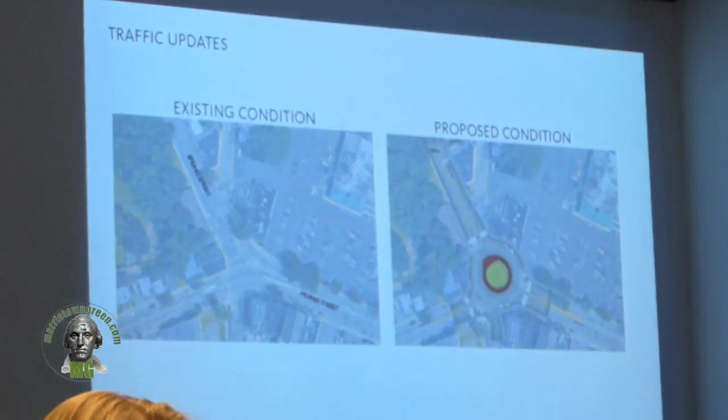The modeling done of the system is extensive, it's integrated, and it actually creates the ability to understand the interaction that occurs between the various signals and the geometries that occur on the roadway system. So that was very important to the project. We also had the ability to reach out to the traffic engineer for the Morristown Parking Authority and get his information on the planned deck that will support some of the other developments that are going on in the area. Certainly we've made projections as to the types and amount of traffic that would be occurring by the redevelopment of the Midtown Shopping Center with this project. So that's been boiled into the numbers as well as other growth in order to take a comprehensive look at the roadway system.

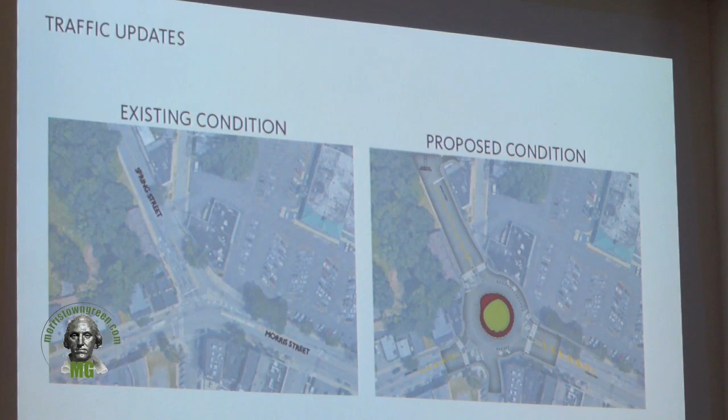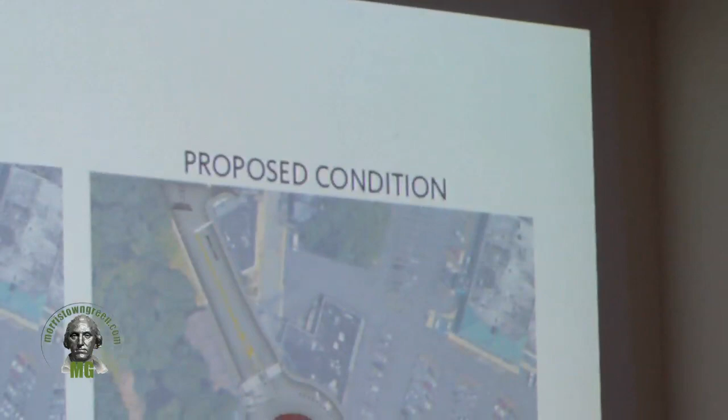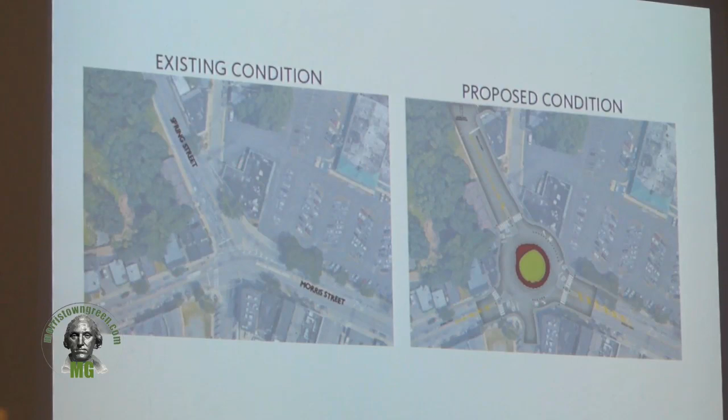We even went a step further to ensure that our operational analysis and analysis of our solutions were feasible and could be implemented. And that step was to actually start to do preliminary design on real survey, so that when we're before this board, we're not just talking about coming in with a concept, with a roundabout that might or might not fit. It fits. It's been designed to a degree that we know it can work geometrically, it can fit geometrically, we've gone to the extent of looking at preliminary grading. So we're here tonight with a wealth of information so that we could be confident what we were projecting to you was more than just preliminary analysis and preliminary suggestion that this is a viable alternative. It is a tested alternative.

We've also had the opportunity over the last several months in particular to interact with your professional, Brian Proska of TPD. He was also very insightful. He's also very knowledgeable about roundabouts and roundabout design, and he provided quite a bit of information and input to both Matt and myself as we tested the proposed solution out here, and helped bring us to where we are today and what we're presenting this evening. So with that, tonight Matt is actually going to take a few minutes and go through the design of the roundabout itself, some of the key features of the roundabout, and generally how it lays out and works.

And then I'm going to step back in and talk about the operational analysis of the roundabout and what it means to the system, to give you a sense of what's happening and why this solution is something that is both exciting and a good fit for both this plan and for Morristown. So with that, Matt. Thank you, Carl.

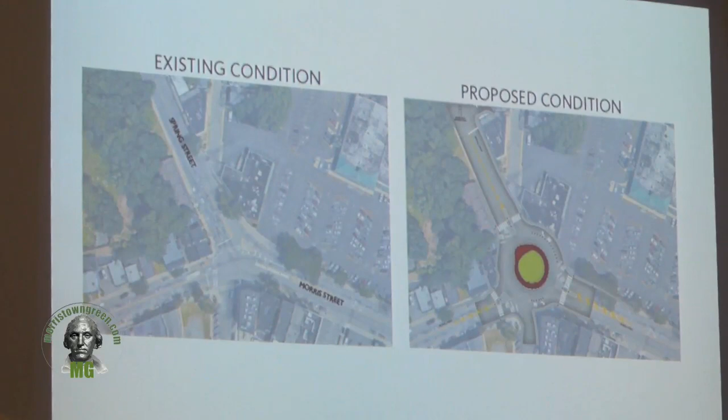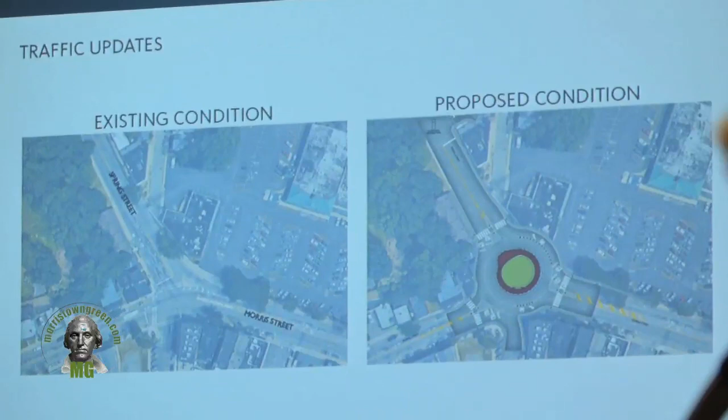Just to orientate the audience here, what we have on the screen before you, on the left-hand side, is the aerial image of what you see out there today. We have Spring Street running from the top left to the center of the screen. You have Morris Street, which kind of does this slight curve. You've got Wilmot coming down to the bottom of the page. That's the existing condition. Everyone who's been out there knows the traffic issues that are experienced at this intersection, particularly during the evening peak hour.

There are times in the morning peak hour, even on Saturdays, where you see a lot of congestion through this area. Obviously, Morristown gets a considerable amount of traffic that just passes through the area as opposed to traffic destined here, so you're somewhat subjected to traffic that is not really coming to any of your uses, but you're stuck dealing with the consequences of it. The intersection, while a Y-shaped roadway network is great for creating vistas from a planning point of view, from a traffic point of view, and there's a number of them in Morristown, can create some traffic issues in terms of operations.

What you have currently is a signal timing that gives the Morris Street approach about 2/3 of the green time. They get the green light, as opposed to Spring Street, which, especially in the PM, sees just as much traffic, is somewhat choked, and you see extensive queuing in which it may take 1, 2, 3 cycles for cars to clear on Spring Street. And that idling, that queuing is not good for anyone. It's not good for the pedestrians, it's not good for the vehicles, the drivers. So you have this existing condition where there's a considerable amount of congestion.

On the right-hand side is the design of our proposed roundabout. Now before I get into this specific roundabout, it's important to separate what people associate with the New Jersey traffic circle from this modern roundabout. This isn't what was in Ledgewood, this isn't what you see down the shore where you have these massive state highways that intersect at these circles at high speeds, at massive diameters, where the right-of-way may differ on each approach. You may have to yield when you're coming into traffic circles, or you may be yielding from the inside. That's not what we're designing here.

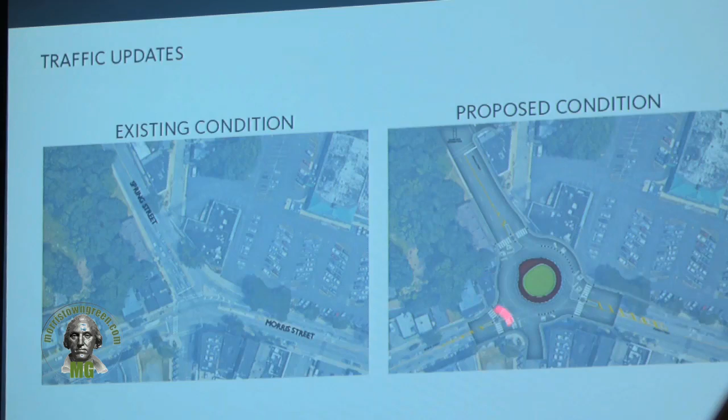So what you currently have at intersections like this, a stop-and-go intersection at a traffic light, you have people gunning it through the light to make it and then slowing down and stopping. At roundabouts, you actually proceed in traffic at around 10 to 15 miles an hour, so you're creating a traffic calming device automatically. People can't speed through a roundabout because they physically cannot deal with the geometry. So people slow down to 10 to 15 miles an hour, a pedestrian level speed. So you no longer have people flying through this intersection, which has enhanced benefits.

Additionally, it creates operational benefits in peak and off-peak time periods. When you get to a traffic light in the middle of the night, you leave a council meeting and it's 11:30 at night, you get stuck at that red light and no one's around, and you're waiting, idling for 30 seconds for the light to turn green. That doesn't happen at a roundabout. At a roundabout, you proceed one after another at all times. The continuous motion of a roundabout, again, helps decrease that stop-and-go feel. You're basically continuously moving through the roundabout.

Additionally, there are improvements as it relates to creating a sense of place. As I mentioned, Y intersections, from an urban planning point of view, are focal points; you see a lot of historic churches located on intersections like that, but it creates an issue from a traffic planning point of view. With this roundabout, you have a new focal point when you're coming from the green or coming into town from 287. You now have a new gateway, something to put in the center of that roundabout, whether it's something artistic or some type of landscaping. It creates a definitive sense of place, which leads to the pedestrian benefits along this entire corridor that we're proposing here before you.

From the pedestrian point of view, there's a significant amount of benefits that we're carrying through from the site plan, which you see at the top of this page, through the crossing mechanisms. At a roundabout, what you have is actually shorter crossing distances than you have at a typical signalized intersection. If this intersection, as a signal, would have to get upgraded or widened, you're talking about 4, 5, 6 lanes of traffic that you have to cross, as opposed to 2 lanes of traffic at a time at a roundabout.

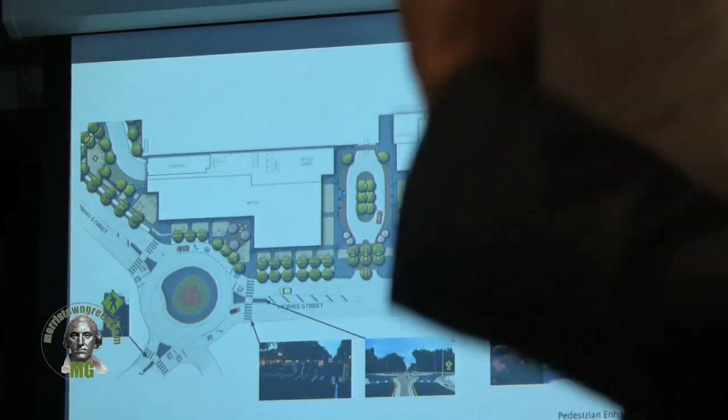As well, when you are approaching a signalized intersection, most of the pedestrian crossings are done at the side of you, so they're out of the visibility of the vehicle when they start to accelerate. At a roundabout, the pedestrian has great visibility to any drivers coming through the area. So there are significant benefits to adding this roundabout as a pedestrian feature.

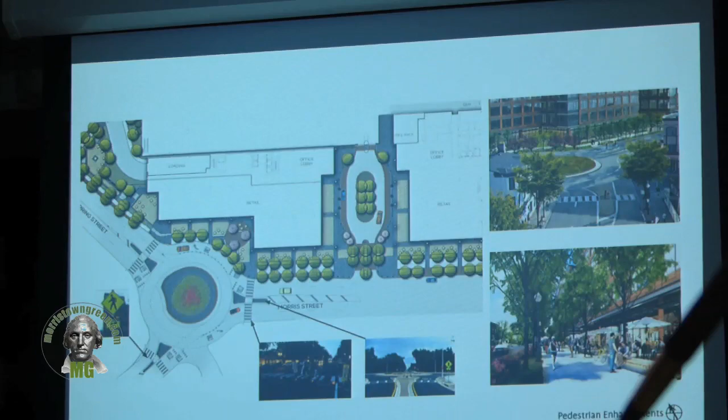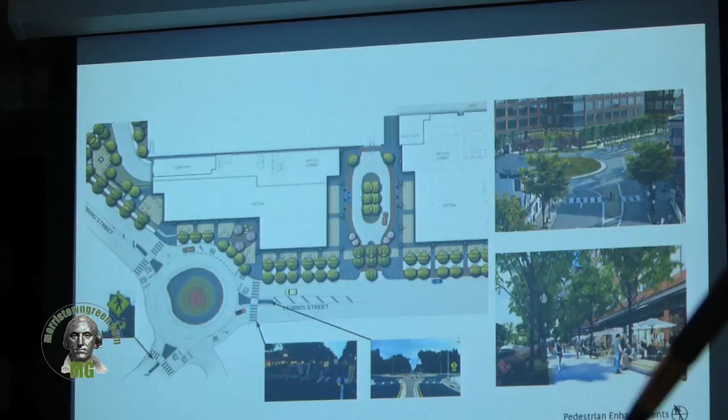As I mentioned, the queuing, and Carl will talk about the operations of this specific roundabout, but the queuing that you see on Spring, queuing you see on Morris is brought down significantly. So you're seeing environmental benefits, as well as the fact that the amount of pavement that we have out here is much less than what a typical traffic signal will require, so you have environmental benefits from a stormwater management point of view. This really helps carry that pedestrian connection that you see in front of this site towards the green by providing this sense of place, this roundabout. Now I'll turn it over to Carl to talk about, from the vehicular standpoint, the benefits we get from this specific roundabout.

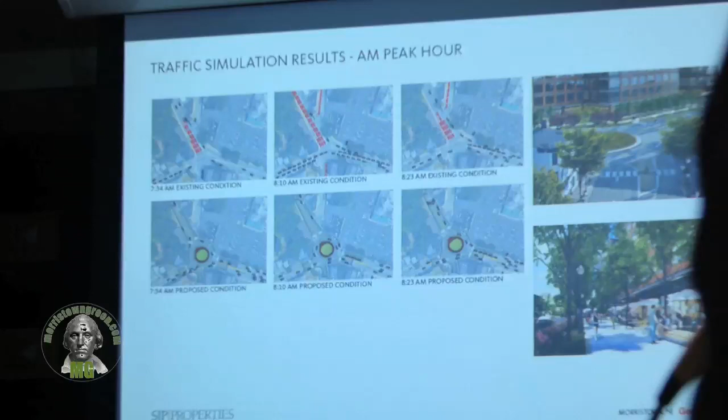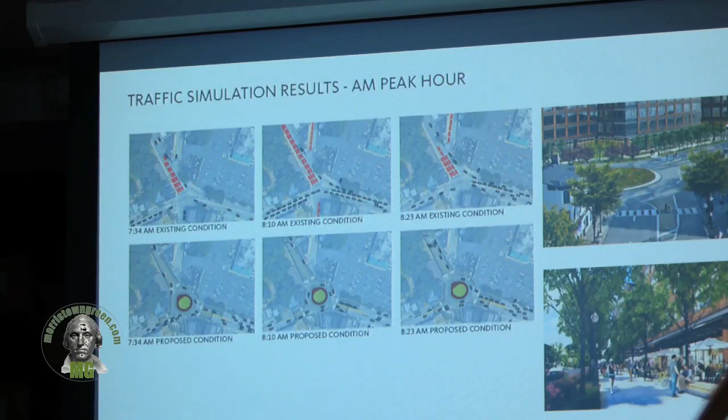Those analyses, as you know from a traffic engineering standpoint, are generally focused on the peak periods of the roadway, which for all intents and purposes occur in the morning peak hours, 7:30 to 8:30, and the evening peak hours out here, about 5 to 6 p.m. Further, in Morristown, the highest traffic flows we've always seen are occurring in that evening peak hour between 5 and 6. If you want to hit to the next slide, I'll just hit a couple of high points in the PM peak hour.

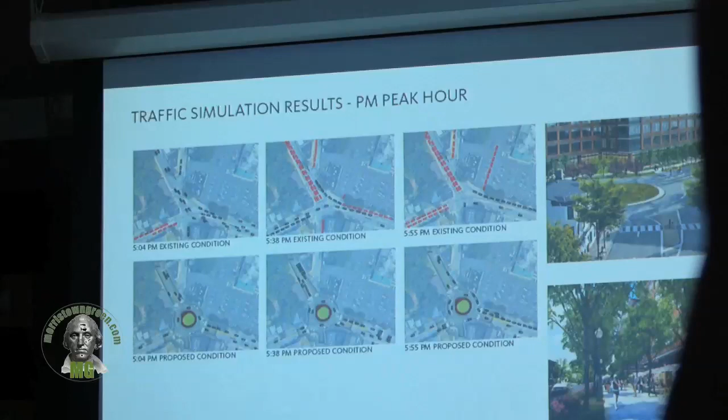What we've depicted up on the screen is basically a couple of snapshots of what the analysis is showing us. We go through a whole series of modeling. We use different modeling techniques, different analysis techniques to cross-check the results, and that includes a level of service analysis, capacity analysis, and queuing and delay analysis of the intersections. So what's shown up here is basically, over the course of that PM hour, a couple of snapshots of what the analysis is showing us.

At the top is the no-build conditions in the future, which probably represent what you see out there every day today: the long queues along Spring Street, the difficulties getting out of Spring Place, queues coming off of Lafayette that at times can extend from our intersection up to the green. In fact, there's times when the approach to the green backs through the intersection and can lock up the intersection a little bit. Below that is the analysis results for the same time period during that hour, which shows that continuous movement result that Matt was talking about earlier, that frees up the flow through this node in the network, eliminating the long queues on Spring Street, reducing the queues both coming to and from the green.

And that occurs because what's happening with the roundabout is that continuous movement, the ability to take the platoon of traffic that comes from the prior intersection and not stop that platoon again and then stop it at the next signal. It allows that platoon to start to dissipate as it carries through the network, as it wants to go to Spring Street or continue on to the next signal on Lafayette.

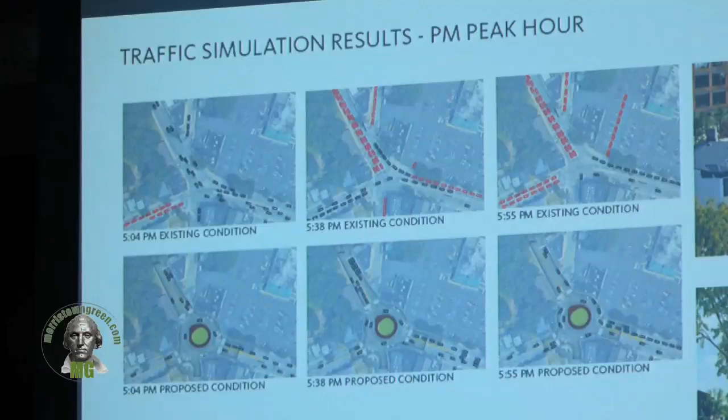That free flow movement also results in some better and more efficient feeding to the downstream signals. So when those signals go green, they're fully loaded and they're ready to process the traffic rather than waiting for the platoon of traffic that may have been held up at this intersection. So what we're seeing overall by the introduction of the roundabout at this location is the introduction of a node in your network that is basically freeing up traffic.

The residual impacts of that is it provides for the opportunity to provide better access to the redevelopment area than the prior solutions and thoughts on this site. Access to the shopping center has always been challenging. This provides the ability to design access that will accommodate the traffic flows that we project. All of this incorporates the development of this property. So basically, we're looking at a roundabout that's really designed in accordance with accepted and current industry practice and standards.

From an analysis capacity standpoint, what we're finding in our analysis is that we are reducing overall peak hour delays through the intersection by 40 to 50%, even with the additional traffic added by the development. It provides for increased capacity for future growth through the system, and as a node, it fits into the overall network of the project. As Matt said, it also is designed to accommodate pedestrian activity that occurs through this area. In fact, it provides for safer pedestrian activity.

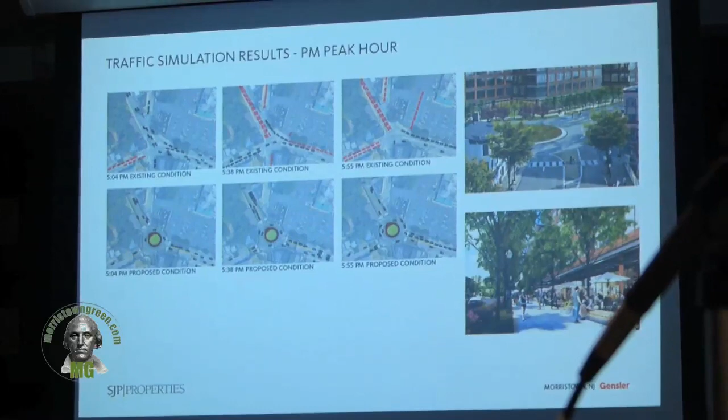A couple of other benefits of the roundabout: analysis has shown that crash severity is reduced, crash rates are reduced as compared to traffic signals, and environmental benefits of the site include reduced emissions and gas consumption.

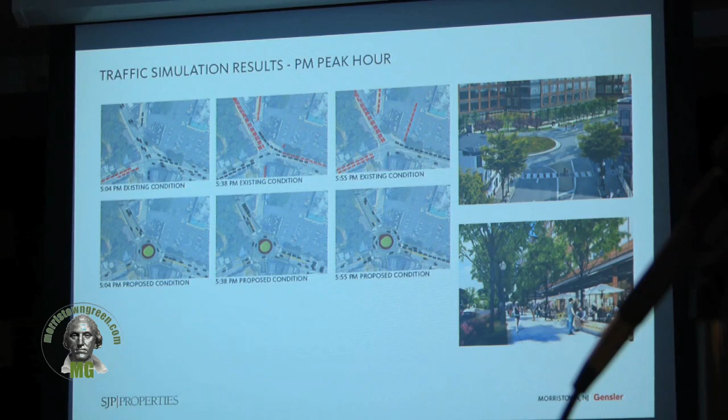What I'd like to do is to take this from a static analysis. Matt and I know the numbers. We're going to show you a quick clip of the PM peak hour. It's a clip right in the middle of that PM peak hour to show the freeing effects that our analysis is showing. It is an illustrative simulation. It doesn't include all the design elements, but it shows the freeing effects that our analysis is showing us.

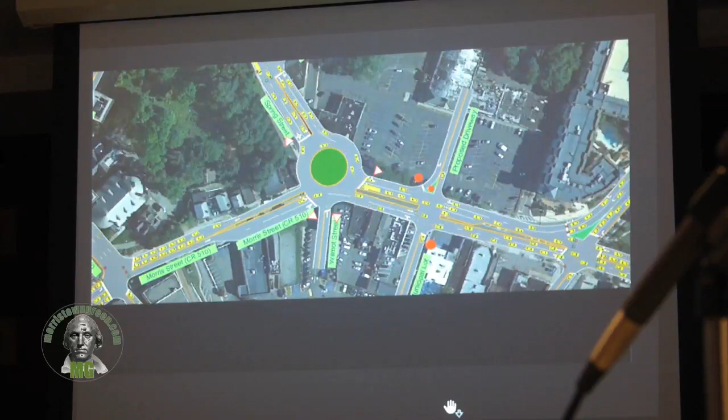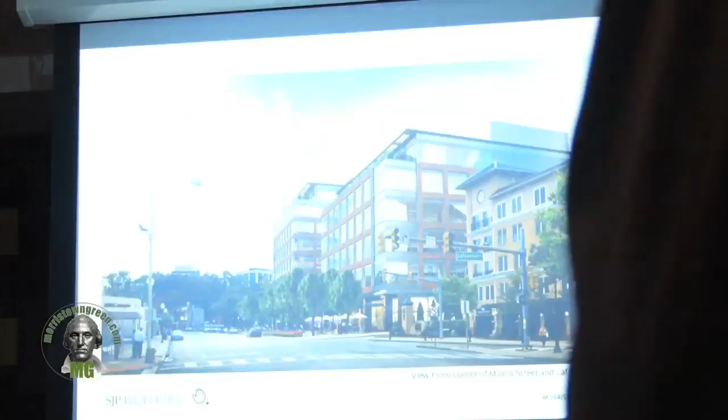Just a quick question, just from a technical perspective. So by free flow, you mean there's no signal, no stop sign control, it's basically just yielding? It's basically a yielding gap accepting process, correct. And how do pedestrians cross? Pedestrians cross on crosswalks. Pedestrians would have the benefits. But how do pedestrians get the break to cross? They get the break by ped-controlled flashing. You've seen the rapid flashing beacons. Those elements are added in.

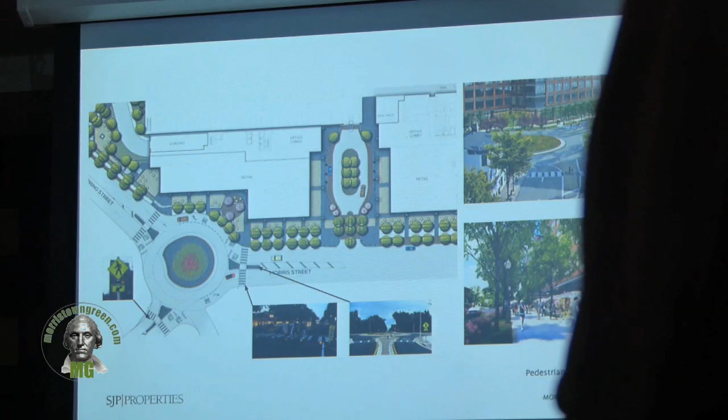When those go, the law in New Jersey now is to stop for pedestrians at crosswalks. That is the state-of-the-art design on the corner. Pedestrians just go when they go. It's like a HAWK. It's a walk, basically, yes. Can you explain that again?

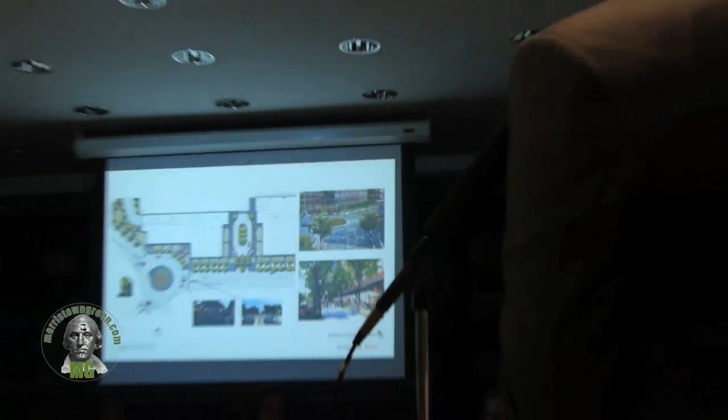So essentially, at a typical traffic signal, you have to wait for the walk sign, you press the button, and then no matter how fast you cross the street, the signal still waits for the flashing don't walk, so you could be across the street and 10 seconds of extra time is lost because the pedestrian already crossed and there's no one else waiting there.

For this type of operation, basically, if you press a button, or you could even have the type where it could actuate, so it could notice that a pedestrian is ready to cross the street, then what you have is these rapid flashing beacons that light up, alert the vehicles that the pedestrian wants to cross the street, and they cross. That could be tied to the in-pavement lighting as well. So overnight, you have that extra visibility at twilight with the in-pavement lighting.

This type of operation is being added more and more. There's a roundabout in Westfield, in Princeton, near their train stations. There's a roundabout in Rutherford, right where a train station and bus stop is. So these roundabouts do exist in areas where there is a high level of pedestrians.

How are those pedestrian crossings timed? It's basically the vehicle could pass through the intersection after the pedestrian passes. A true HAWK design, the ones with red lights that flash, you typically have to wait until the light changes off of red. These pedestrian flashing beacons basically indicate once the pedestrian's passed, the vehicle could pass through. So it's less delay on the vehicle after the pedestrian passes.

With that, I think we'd like to turn it back to Roger to continue on our presentation this evening.